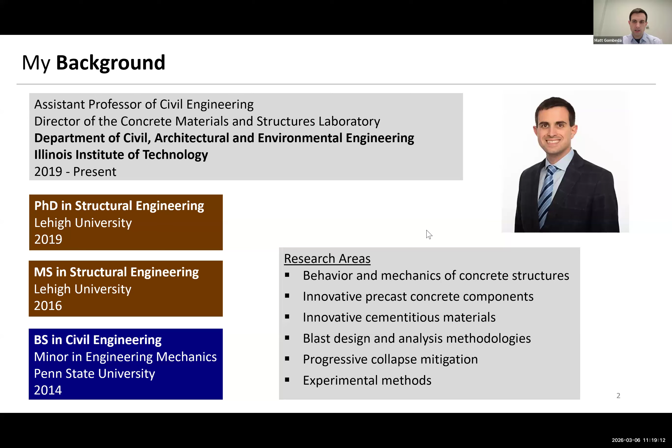Just a little bit about me. Prannoy gave me most of the introduction, but I will show you here again. I went to Lehigh for grad school, and to Penn State for undergrad way back in the day. I work mostly on concrete structures and materials, but a lot with applications for precast, and some blast design and progressive collapse work previously in my graduate school, and even a little bit today as well.

Here is a photo of the other half of the space, which is our high bay, which includes a post-tension precast reaction floor and buttress wall that we designed and erected ourselves, actually. And on the right is an 800,000 pound universal testing machine that we use pretty heavily for some of our tests, as you'll see later.

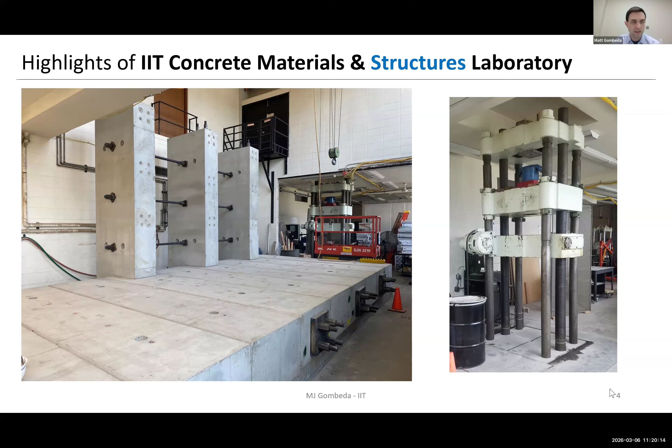Here's just a picture I like to show, as we were erecting the reaction floor. It's kind of funny because Stan, one of our shop technicians, the going joke was that he was just sad because we were taking over the lab with all this new stuff. But in reality he was looking at a little bit of damage on the door, so he was actually quite happy that day.

So, a quick outline of what I'll cover today: I'll do a brief overview and refresher for precast concrete for those that might not be as familiar. I'll talk about some of the work we've done on high volume fly ash concretes with high early strength, and a little bit on concretes for precast that were driven by high early flexural strength as opposed to high compressive strength, which is commonly done in a lot of cases.

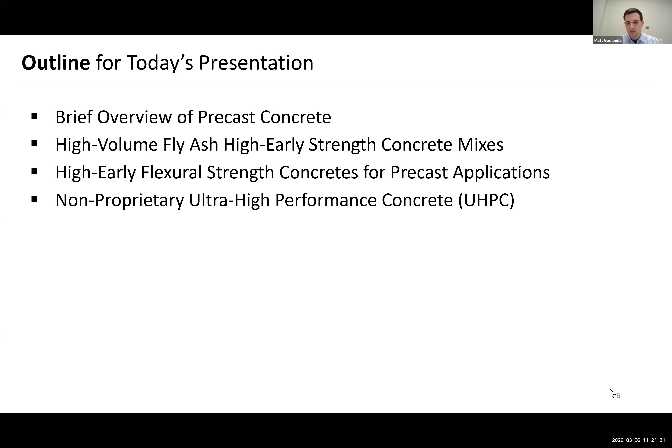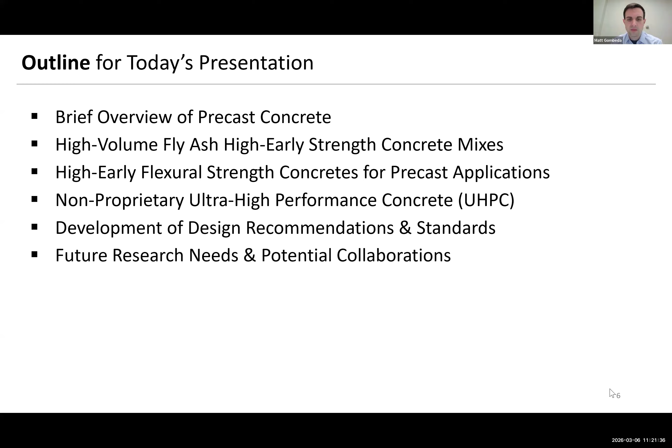I'll also touch a little bit on our work on non-proprietary UHPC and the strength development and the relative early age window that we had with those mixes. I'll talk about some of my involvement that relates to these areas on the design recommendations and design standards across PCI and ACI. And then I'll talk a little bit about what I think the future research needs are and some potential collaborations that I'd like to explore in the future.

So what I'd like to do now is get into a quick overview of precast concrete. The most simple definition I can give is when you're fabricating a structural or architectural component in a location other than where it's going to be in its final position.

It can be tilt up, which means you are building on site and it's cast on the ground, and you literally tilt it up and it stands up as a wall and becomes part of the building. It's not done in a factory, but they use ready mix trucks and cast it right on the ground at the job site.

There's also factory precast, where you have it in controlled conditions. It's indoor and you still have to lift it and move it into position, but now it goes on a truck first before it goes to the job site.

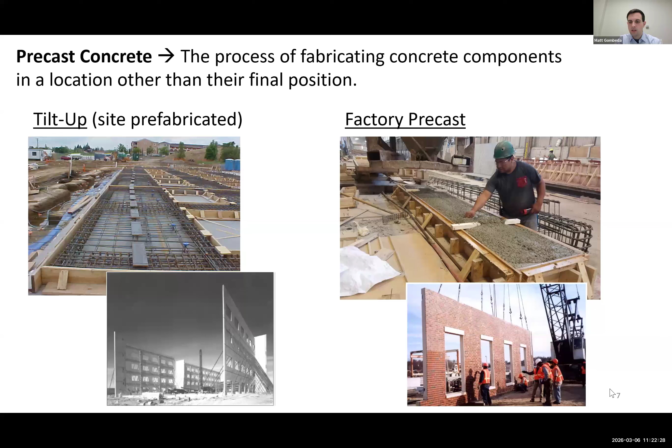Here's one example of a specific precast component that I've worked a lot on. It's called a precast insulated wall panel. It's got two concrete wythes, which can be pre-stressed or non-pre-stressed, but mostly pre-stressed. There's a layer of insulation in the middle that helps improve the R value thermal resistance of the wall.

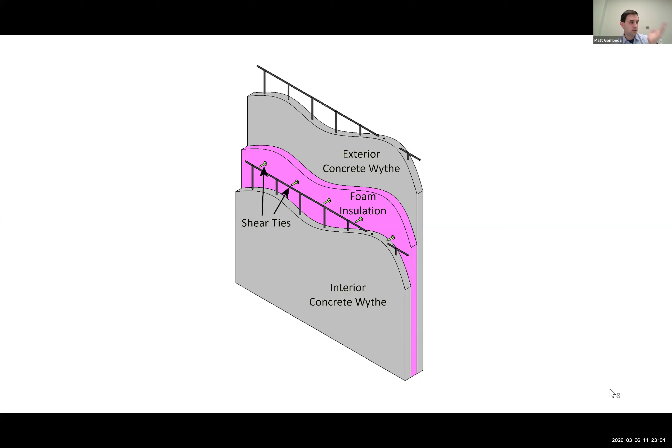But in order to make the wall behave compositely and have benefits for checking stresses and deflections, we connect the two concrete wythes with connectors. Those connectors are usually made of polymers to help further reduce the transmission of thermal energy across the structure. I've done a lot of work on testing those connectors and developing design standards for insulated wall panels in general, which I'll talk about at the end.

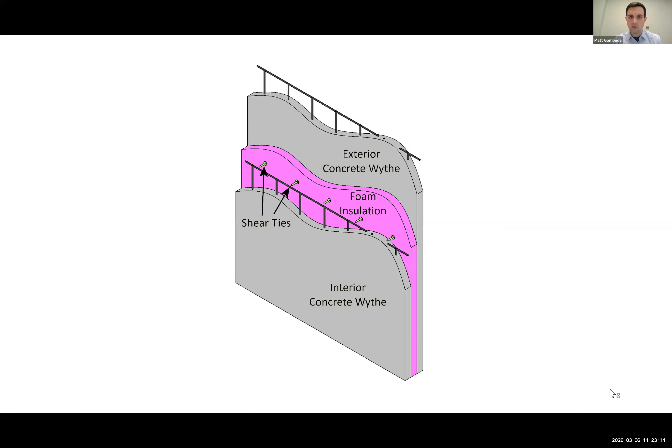But if we're doing precast, we have to not only cast it in a bed and then lift it out, we have to do it very quickly. The reason we want to do it very quickly is a business thing, an operational thing. The more precast components they can make out of a single casting bed, the more efficient from a financial perspective the business is.

We're talking about within 24 hours on most occasions, probably even less most of the time. And for pre-stress members, the pre-stressing strands have to be released before we can remove it from the formwork. So now we have to design for early age compression as the pre-stressing is applied.

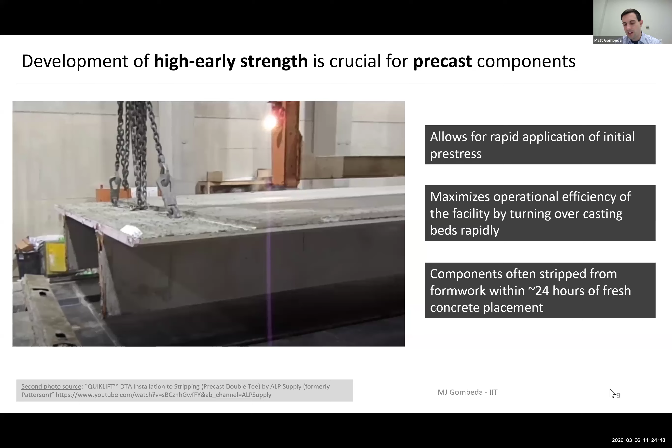We also have to design for early age flexural strength, because when the member is lifted out of the bed, it wants to deflect under its own self-weight. Generally, the number people have targeted is 3,500 PSI compressive strength within 24 hours or less. That number has only gotten more stringent as they try to be more efficient with different designs. So it's kind of like a baseline minimum at the very least.

So I'll walk you through some of the projects here. There's a lot of information and I'll go a little quickly, but if you have questions at the end, I'll be happy to take them.

The first one I want to talk about is a project funded by DOE starting in 2020, on high volume fly ash for high early strength concrete mixes. It was a collaboration—IIT was the lead, with Penn State and Lehigh also involved. The goal of this project was to increase the beneficial use of fly ash by at least 15% in precast.

The reason there's been limitations for having higher uses of fly ash or other SCMs is because we're sometimes at a disadvantage with early age strength gains when we have materials with lower heats of hydration. So there's been a cap, like about 25% for many years of fly ash, because they were worried you couldn't get the higher early strengths if you went to higher dosages of fly ash.

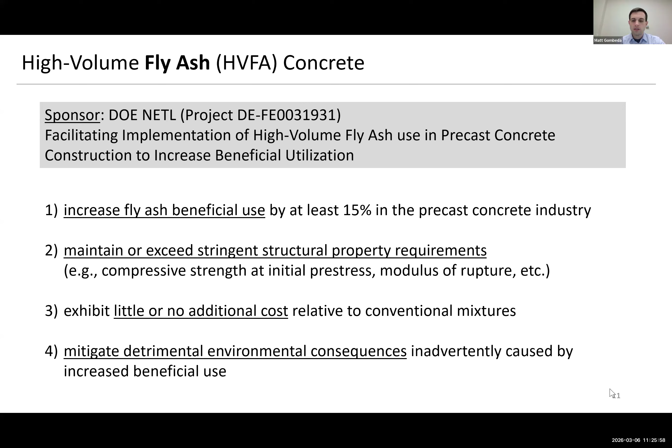We wanted to change that narrative and find other ways to get the early strength even with more fly ash. You can see here an example: typically we're using type 3 cement traditionally in precast mixes, and you get that really high rapid strength gain early on. But when you start to replace that type 3 with larger volumes of fly ash, you start to get lower strength gains—the curve is going to be more similar to what you'd see in an old school type 2 or 1-2 cement at higher dosages.

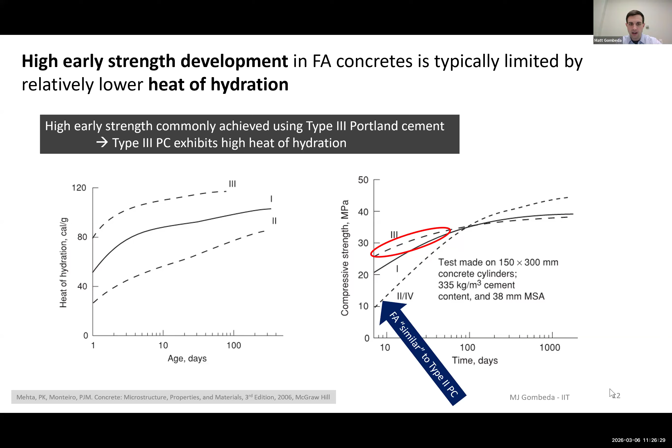You can also see here the effect from another study we did as part of a literature review, where the solid line on both curves is the control, the same mix. When the dosage of fly ash goes up from 20 to 40%, we see a significant reduction in strength gain over 0 to 28 days. But specifically in the early age window, which is where we're most concerned about, that study didn't zoom in on that area as much as we wanted to in our project.

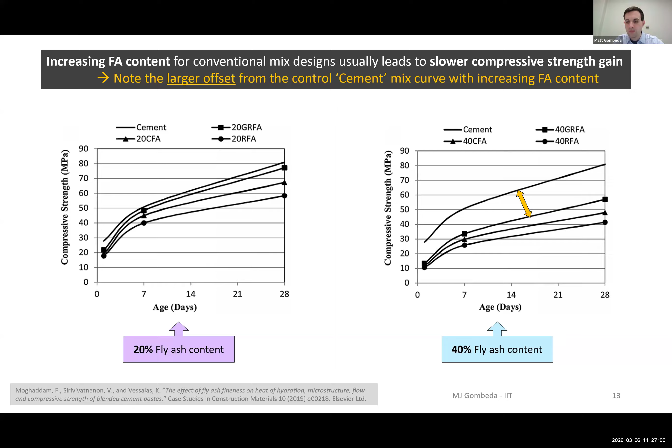So what did we do? The first thing was develop what we called optimized binders. We increased fly ash from 25 to 40%, and looked at using a fresh class C and F, and also a landfill ash from Pennsylvania, with different optimization strategies for dosages, including gypsum optimization that I'll talk about in a bit, and admixture optimization.

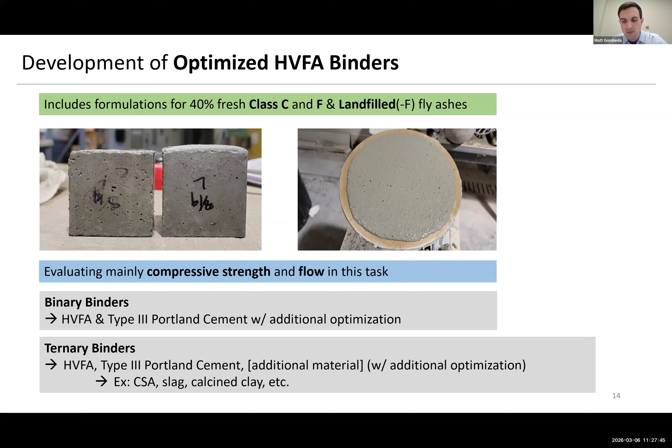We looked at binary binders, but just type 3, because back in 2020, 1L wasn't really common on the market yet. So it was mostly type 3 and high volume fly ash. We also did some ternary binders, which didn't seem as promising, so we moved forward with the binary options.

Here's how we narrowed down which ones to look at from the mortar cubes at this point. Our goal was 4,000 PSI compressive strength at 24 hours for the mortar samples, knowing that if we scale up to a concrete cylinder there's a discrepancy in strength. So we wanted to be conservative when looking at these results.

There's a lot of data here looking at different accelerator dosages and different types of fly ash. But the key takeaway is we were able to exceed our goal of 4,000 for a lot of these options, which helped inform the concrete strength. I should note this part of the study was done by Penn State in collaboration with us at IIT.

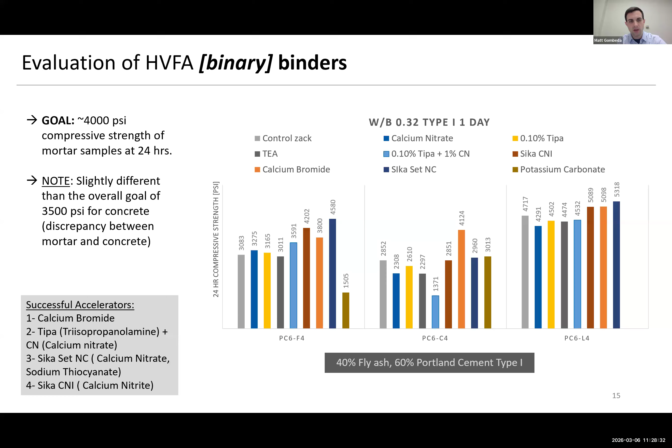One thing crucial to dialing in our strength development was gypsum optimization. When we add more fly ash and reduce Portland cement, we lose some of that gypsum content that helps balance the mix chemically. So we add back gypsum to an optimal dosage to facilitate strength gain, most effective with our dosages of 60% cement and 40% fly ash, plus a little extra gypsum.

This process looks at different trials of gypsum dosages, finding where the peak compressive strength lies with regard to how much SO3 content is added into the binder. For the different types of fly ash, we were able to determine that optimum value of SO3.

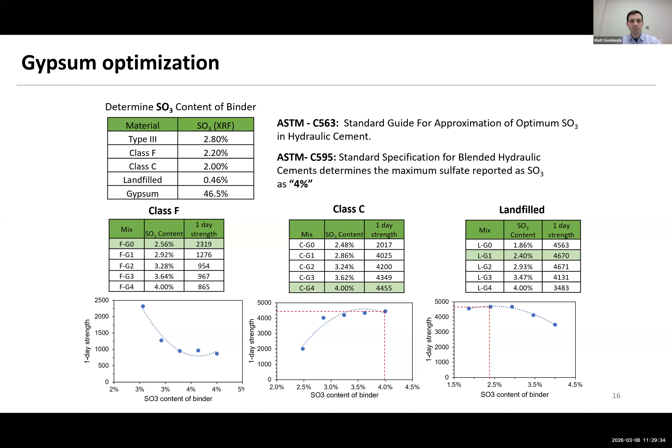We also did another study on accelerator optimization, using a few different products, and narrowed down the dosages of those to again help inform the effect on strength gain.

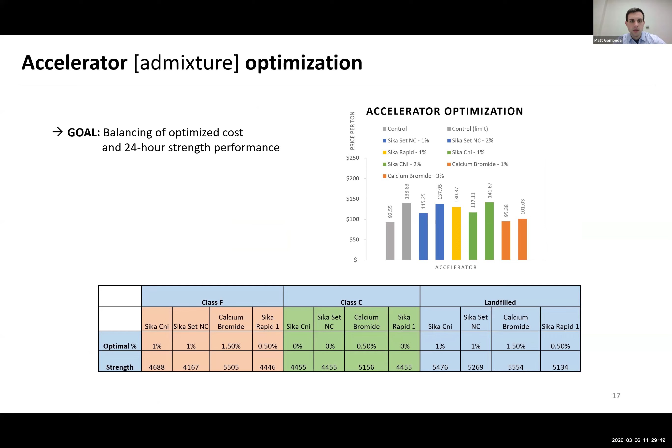So we did 12, 18, 24 hours for the most part, and then also 28-day breaks just to be able to compare to the standard time frame for compressive strength testing as well.

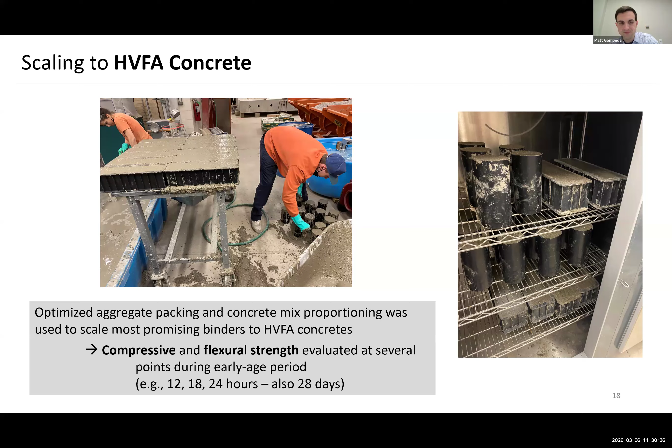Here's a picture of our finished SCC mix in the wheelbarrow, straight out of the mixer. And here's some results for compressive strength. Our minimum goal was 3,500 at 24 hours, and wherever I have the light green is where we've hit that target.

For some of the mixes, a fresh class F, and some Type IL mixes towards the end of the project as those cements were starting to replace the old type 3, we were able to hit our target within 16 hours in a few of the mixes.

An average of 3 cylinders here gets us the results in the table. And then for all of the other mixes, most of them anyway, we were able to hit our goal within 24 hours and a lot of them within the 20-hour window. And we're not using any heat to accelerate the mix. It's purely based on the mix design optimization and the accelerators.

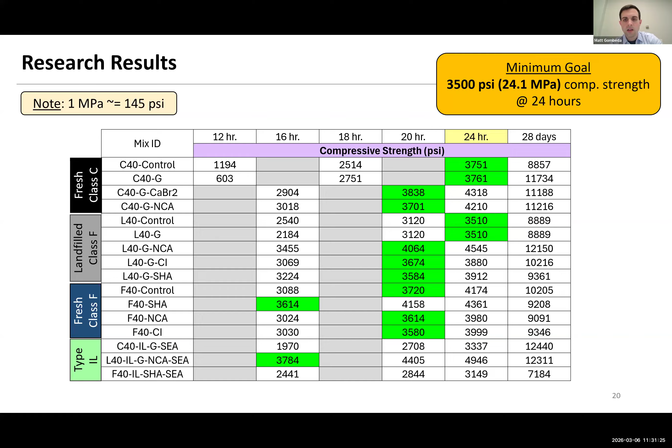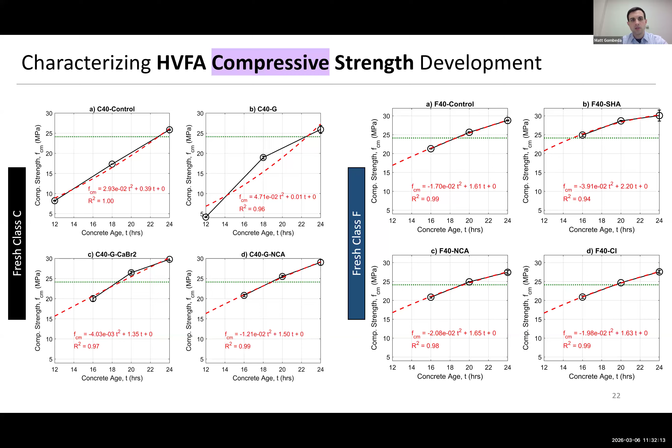The more interesting way to look at the data is plotting it over time to look at the strength gain. What we tried to do here was basically extrapolate the data points that we had to form these curves that could help generalize for these types of mixes what the strength gain profile would look like. So if you had a specific compressive strength target, it could help in the preliminary mix design stage for a precaster to estimate approximately at what age they would be able to get that value. Now, it doesn't replace testing in a plant. They're still going to have to do it for their own mix, but it was sort of a preliminary thing that could help inform how to hit those early strength targets.

And you can see it here for the different types of fly ash, and also at the end, like I said, we included the IL cements.

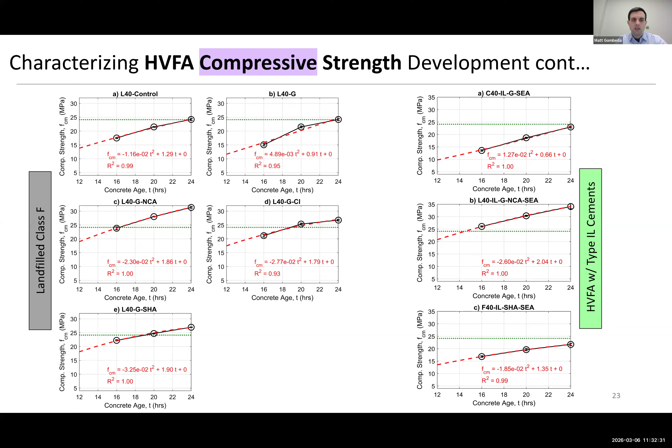Now here's an interesting one. I like this plot because when we relate modulus of rupture, typically it's done by taking the square root of the compressive strength, and the factor in front of it from the ACI code in chapter 19 is usually 7.5. Forgive me here, they're in metric units, so the number is 0.62 instead of 7.5. But you can see here we plotted for the different mixes to determine how conservative or unconservative that ACI equation was, for 2 reasons: because we were changing the mix design, so we have different properties now, but also because that equation was largely initially developed at later ages. So we're trying to actually see how the early age behavior is characterized in this sense.

We found that most of the time it was conservative, which is safe, but also in terms of dialing in the efficiency of the precast plant, the ability to do flexural testing on your own can help get a better idea of exactly when those performance targets are hit.

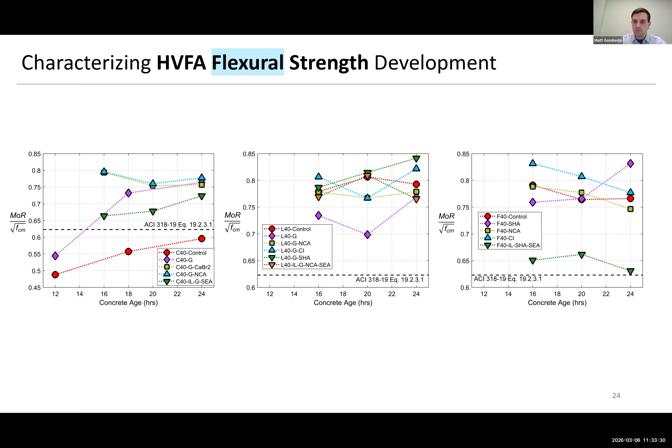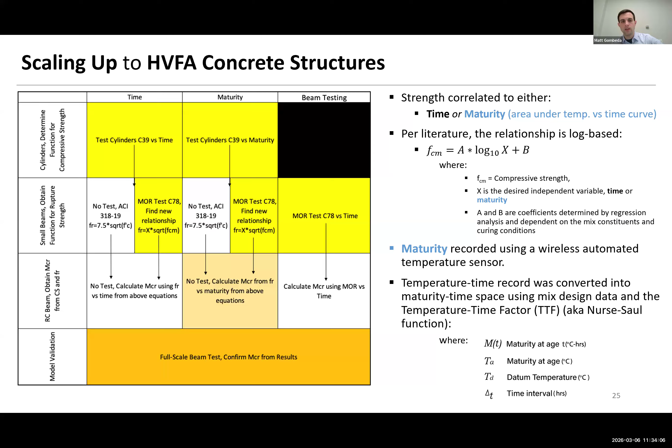So we did some larger scale tests with some inverted T-beams, and our lab is kind of like a mini precast plant. We were able to actually fabricate everything in-house and test it in the same space, a kind of unique thing that we can do here. But if you look closely, you can see there's a maturity sensor on the far end.

So it's monitoring, like I said, the temperature in the concrete. And then one of those sensors is also put in a cylinder when you do the test for compressive strength. Then you can correlate the temperature for both specimens, and we have information that helps tell us predict what the strength in this beam is before we even test it.

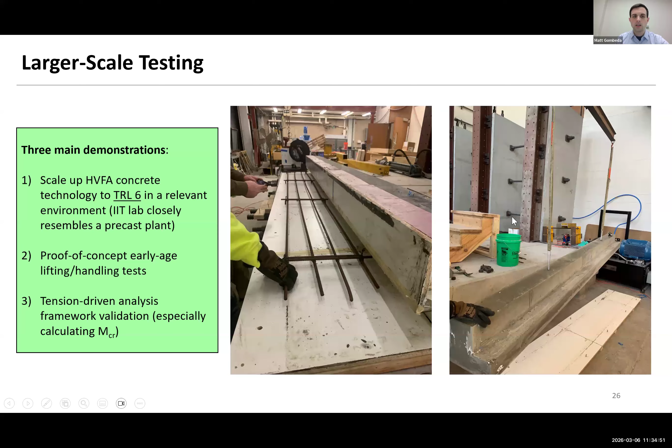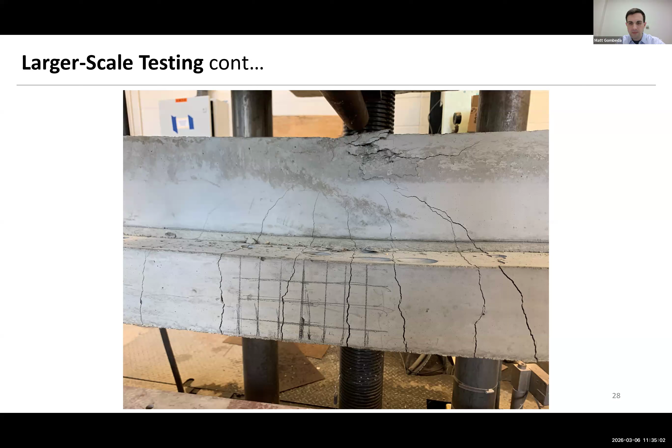So when you use maturity versus when you use just the concrete strength versus time, versus when you do actual modulus of rupture testing, you're going to get slightly different estimates of how you can calculate the cracking moment of the beam, which is something we focused on because, again, with early age lifting and handling, it's a primary design objective in precast. So our comparisons are pretty close. They're a little conservative, but they're within a reasonable amount of error, and we felt confident in our framework and the underlying method used to predict the cracking moment strength.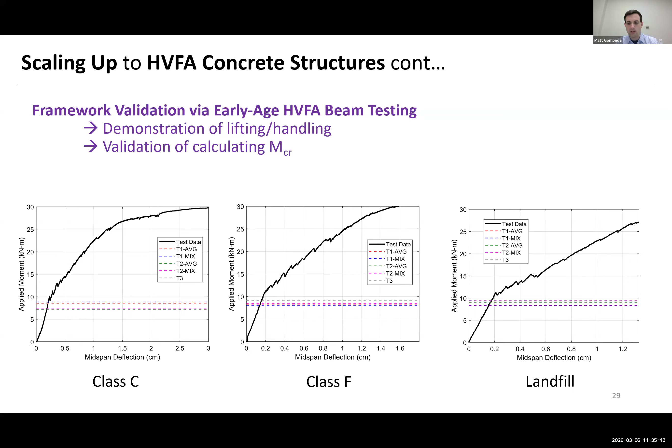So the next project was funded by ACI Foundation back in 2022, and I worked on it with a colleague of mine at Urbana-Champaign, on high-early flexural strength concretes for precast.

The objective was to evaluate the progression of high-early tensile strength, or high-early flexural strength, in non-proprietary high strength concretes that were specifically developed to have that enhanced flexural strength.

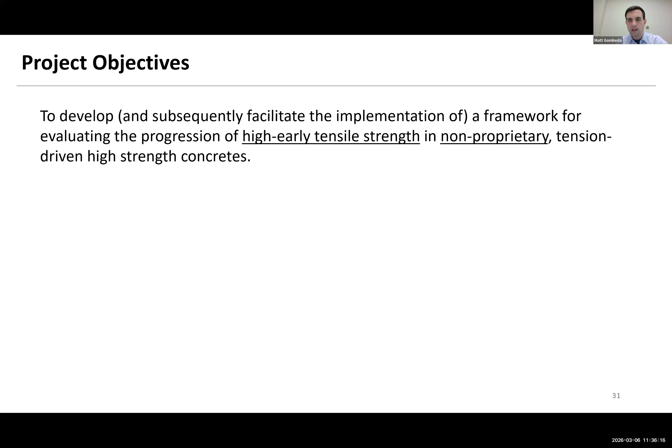In the past, we're so used to this equation where we have a set compressive strength and then we're asked to calculate the flexural strength as a result of that number. But we wanted to move towards a performance-driven flexural strength mix design approach.

We wanted to target a specific number of a modulus of rupture at about 750 psi at about 18 hours. Typically you can hit that number with UHPC or really high strength concretes, but we wanted to create it in a mix that would not have the difficulties or added complexities of UHPC, and also wouldn't exactly tie it to that compressive strength of about 18,000 or so. So it was really performance specifically targeting that flexural strength.

Again, this is great for the precast industry, also great for things like tall building construction where they need to keep moving up floors and release shoring and that sort of thing.

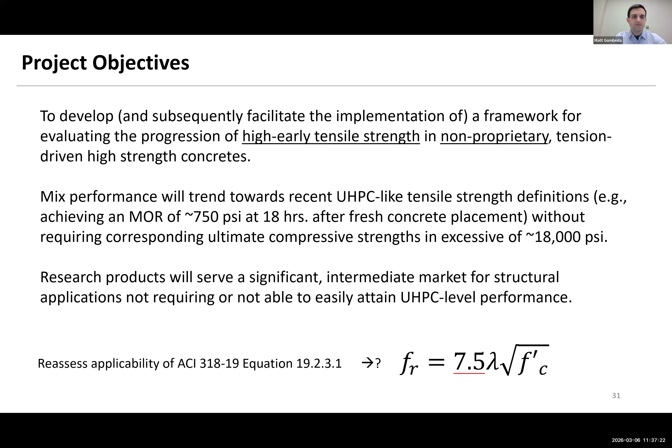So there were trial binders that were started. We generally start from the binders themselves and then scale to concrete and then go to structural testing, as you'll see here. Particle packing was a big part of this work, and my colleagues at Urbana led that effort.

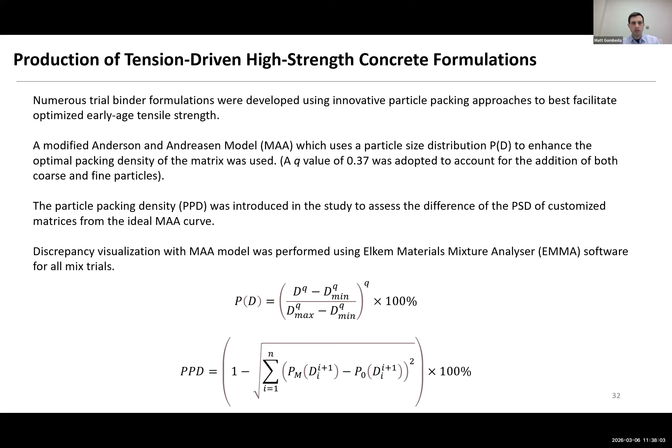They also introduced this term particle packing density to assess the difference of the densities of the customized matrices from an ideal curve, for example. And then they used software to basically visualize these analyses and help inform how particle sizes would be useful in different trial variations of the binders for the concretes.

So here you can see the particle size distributions for some of the materials, with a fine aggregate within the ASTM C33 limits, also for the coarse, the Type IL cement, and then some of the SCMs that were used as well, in the bottom right.

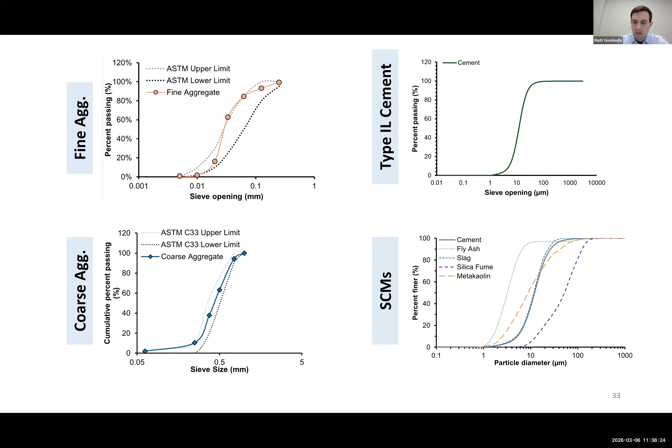And then here's the resulting mixes that we did. Forgive the numbering, but there were trials before 6 that didn't make the cut. So 6 and 7 were the ones that we moved forward with, and you could see the relatively high particle packing density above 90% for both of them. It's doing a pretty decent job of hugging that ideal curve from the A&A model, which is why we decided to move forward with it.

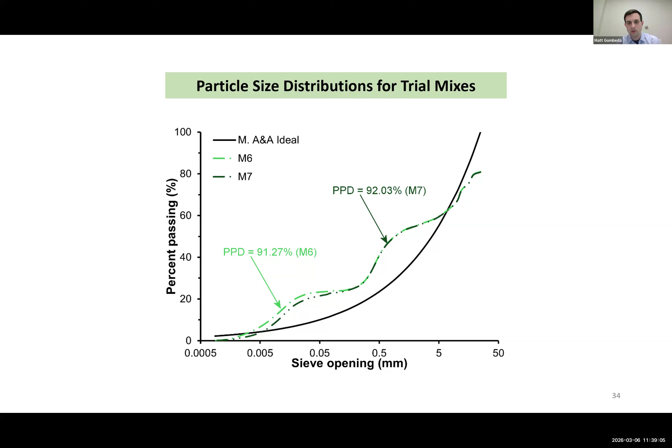It's always a balance, right? We want to develop things that are theoretically as correct as possible, but also understand that using local materials and standardized equipment is going to change how far you can push these efforts. So it's kind of a break-even point of how we can optimize our results.

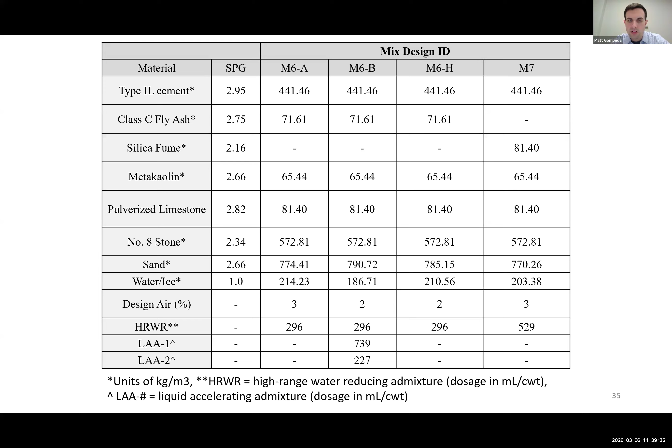And here are the mix designs. I won't go through it all, but we basically had two variations of the M6 mix with different dosages of an accelerating admixture. The second one also had a third variation applying heat to help further expedite the flexural strength gain. And then the last one was using silica fume as a replacement for Class C fly ash.

Here's some workability properties that we measured from the testing that we did. All of the slump flow target was to get SCC performance, so we're at or above a 20-inch slump flow in each of those cases, which was satisfactory for us.

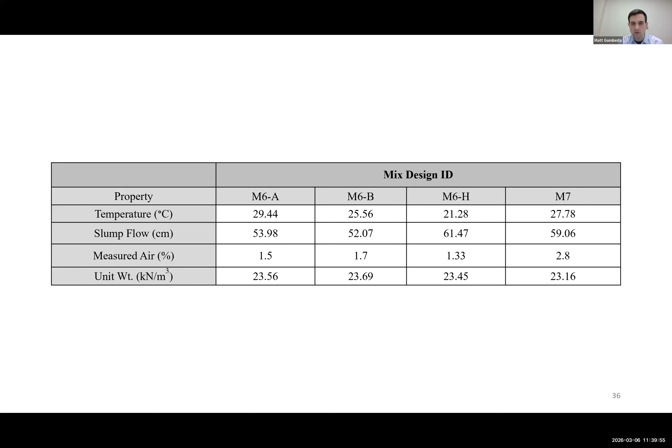Then we look at the early age modulus of rupture performance. Our target was again 750 at 18 hours. We got pretty close — it wasn't easy, but we were able to get 722 in the heat mix, and over 700 in the first M6 mix. As we get to 21 hours, we start getting really close to that target, and we're surpassing it pretty easily at 24 hours. So while we didn't exactly get it at 18, we got it pretty close.

There still can be tweaking that can be done to even push it over that threshold, and we're still working on some of that stuff.

Just to give you an idea of the corresponding compressive strength, at 18 hours we have 47 MPa, so somewhere less than 7,000 PSI, high 6s. We're hitting these targets that normally we would hit with much higher strength concretes, but we're in the 6 or 7,000 PSI compressive strength range, which shows that difference in the correlation of those two values.

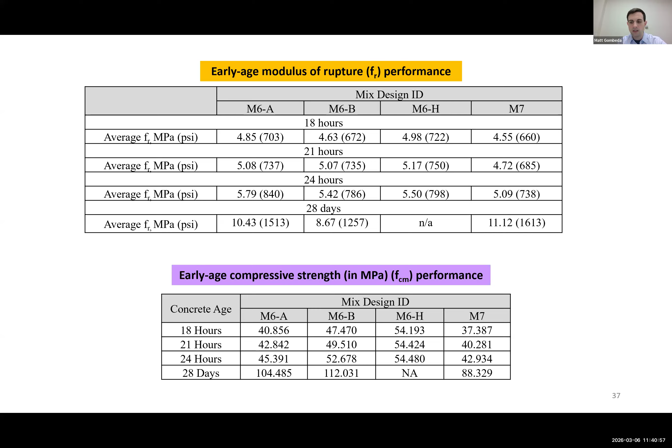Even if it's a little bit conservative, there's still some room to dial it in a little closer.

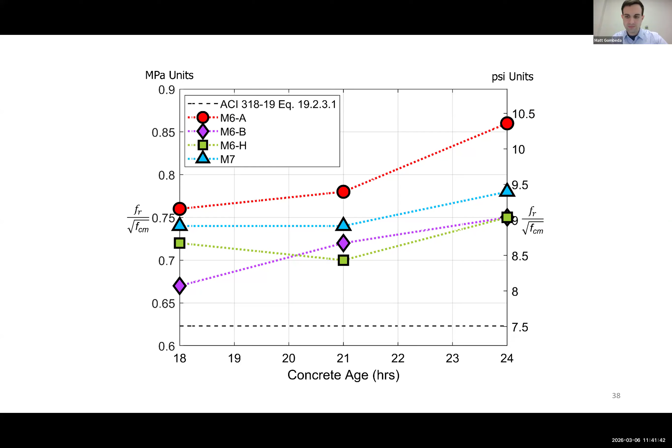Here's some testing we did on modulus of elasticity, which basically shows that the ACI equation for MOE, which is 57,000, is a little bit unconservative in a lot of these mixes, likely due to even some of the aggregate properties and whatnot. But I don't want to alarm anybody here. One suggestion is if you're going through all the trouble to do flexural strength testing and compressive strength testing, it's not terribly more difficult to also do the MOE testing, which helps get better estimates for things like deflections and stiffness when needed as part of structural analyses.

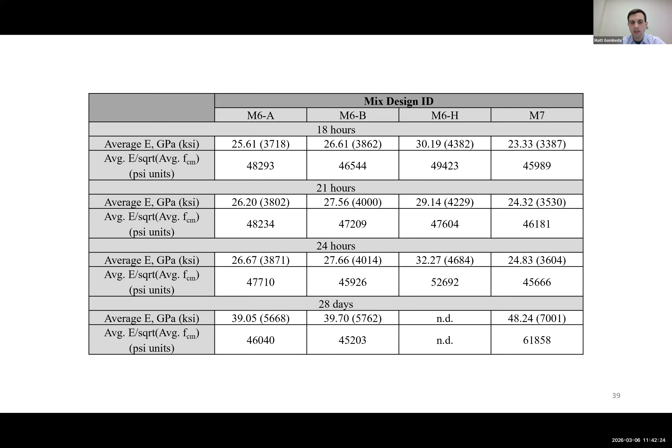We did structural testing on that one as well. Again, something we fabricated. My students work on putting the rebar cage and reinforcement cage together, and we do all this stuff in-house. So we kind of pride ourselves on the ability to do all that.

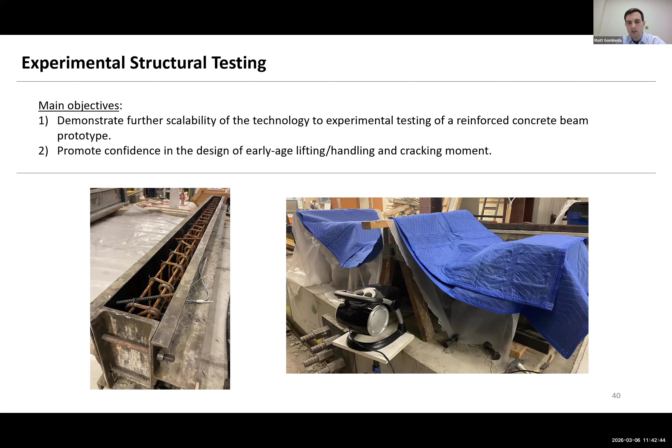It was heat cured. The beam was heat cured, as you see there on the right. And then here's some photos of the test.

We basically used the properties that we had generated earlier into an open source component level fiber beam column element model and predicted the results. Generally speaking, it's a pretty decent match.

Once you start to get past the yield point or whatever in structural concrete, matching becomes more and more difficult. With more work, we'd fine tune that curve, but in general we were able to show that we're in the right ballpark and our peak strength is within some reasonable amount of error of taking those properties in the calculations and predicting the test results.

Here's another example on the stiffness side, with a reasonably small percent error in the tangent stiffness from the test and the theoretical stiffness when we calculated it from the E that we measured in the test and the gross moment of inertia.

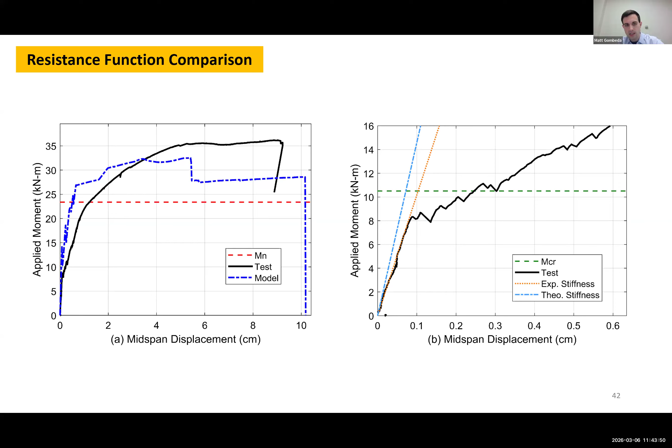The last project here that I'd like to talk about is our work in non-proprietary UHPC, again with Urbana-Champaign. This one is funded by IDOT.

I'm sure most people here have an idea what UHPC is, but we always give this general slide of what it is and show this nice pretty curve. Great, but I like to refresh everybody with the minimum definitions for strength.

ACI 239 says that in compression it used to be 22,000, but in recent PRC it's come down to 17,500, which is consistent with what Federal Highway also specifies in their documents. On the tensile side, we have the ability to take advantage of the increased tensile strength and tensile ductility when we have steel fibers included. What 239 now says is that the direct tensile strength should exceed 720 psi, and Federal Highway says the effective cracking strength in direct tension, basically the strength of the UHPC specimen before it initiates cracking, before the ductility really takes over, should be about 750 psi minimum.

But the current obstacles are not so much on the strength side. It has a lot to do with the proprietary nature making things more expensive, and non-proprietary mix designs require a little bit more thinking and frameworks. There's still a relatively high cost associated with these mixes, and mix times are too long.

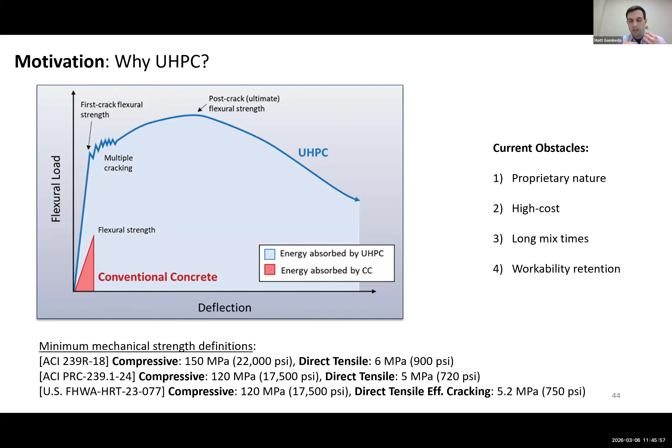Workability retention is a huge issue. The flow being met right out of the mixer is one thing, but then you come back ten minutes later and we get things like skin formation. This mix really starts setting very quickly and it's hard to finish, which is a problem.

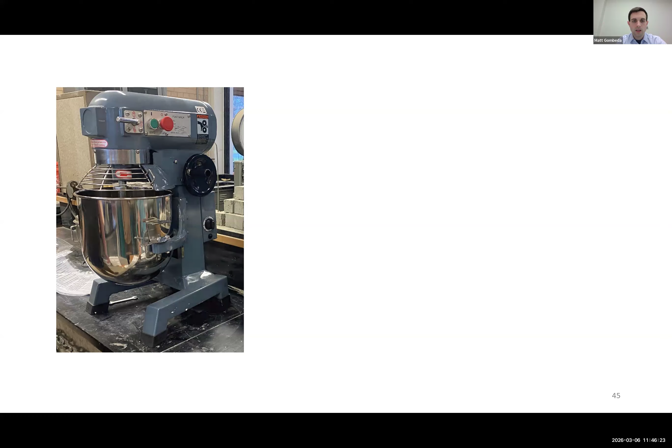So what we did is we basically re-engineered some of these mix designs for non-proprietary mixes to be able to be used with local materials in Illinois. It started on a benchtop scale with small cube specimens using this mixer here. We developed this method of when to add the materials, how long to spin the mixer, and how to evaluate the performance at different steps before we discharge and make specimens.

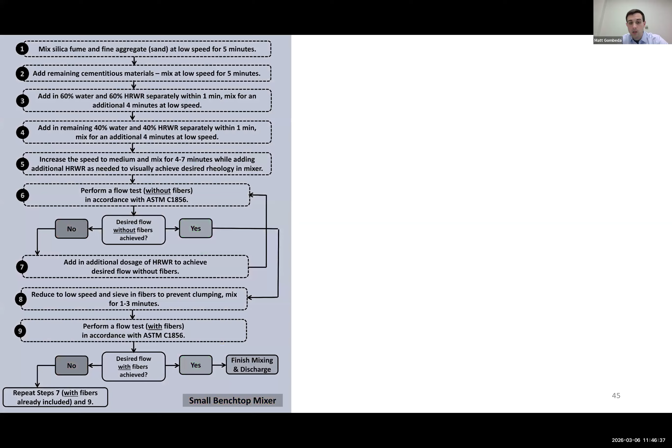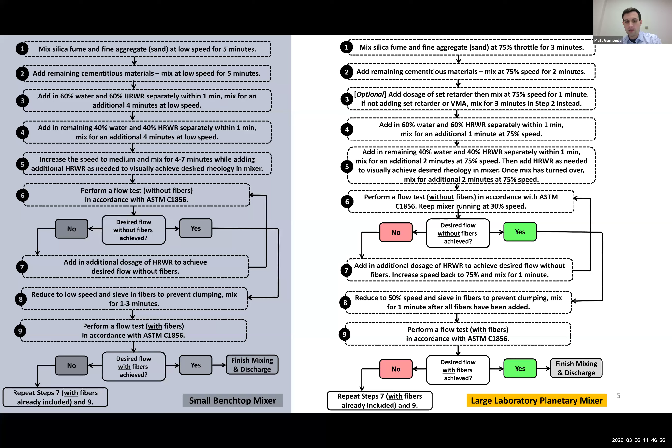But that method was ultimately superseded at the larger scale when we went up to the bigger mixer. You can see it's very similar to the framework, but a little different because we had to dial in how the larger quantity of concrete affects this work and the different type of mixing action. So what we did was get these results for a couple different variations of the UHPC mix.

So we have one that is chamber cured in accordance with C511. We had one that used a class F fly ash sieved through number 200 to emulate an ultra-fine fly ash, which was part of the original development. We recognized that not everybody had access to the ultra-fine fly ash, so we wanted to come up with an equivalent way to produce it with the standard fly ash.

And then we also had the dash A ones that were done ambient. Some of these members you're not going to have the luxury to do in a chamber, so we wanted to also look at the variation in strength when we had ambient conditions versus ideal conditions in the chamber.

You can see the compressive strengths here, the cube specimens in the table on the left, and then the cylinder specimens on the right that we did at the larger scale, the last three of which had 2% steel fibers in addition, and the first ones we did with the cubes did not in this case.

So just a little bit of looking at the variation here. The average of the specimens done at the 3x6 scale versus the cubes were within about 6% difference on average. Again, there's no fibers, but we recognize the fibers don't have a substantial role in the compressive strength. We're not evaluating tensile ductility right now, but we just wanted to make this first comparison.

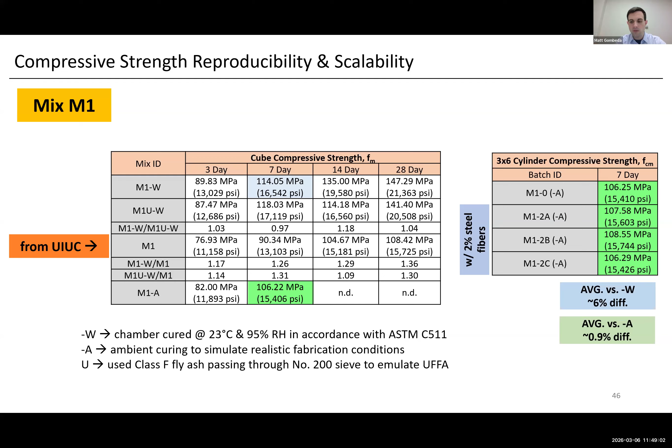Here's an interesting study we did that looked at calculating some of the statistics. The goal here was to calculate the coefficient of variation considering all these different variations we did in the mixes. The first column is all of the different mixes with the different scales, the cubes and the bigger scales, and all of the different changes in fiber dosage and all that stuff. So there's not consistency there, but it's done on purpose just to see what the overall COV was across everything.

And it was about 7%, which isn't terrible. When we just look at the stuff done in our lab - the initial one was done at UIUC - when we look at just everything done at IIT, it was reduced to 4%. When we look at everything that includes just the standard Class F fly ash, it goes down to 2.8, as opposed to the sieved version.

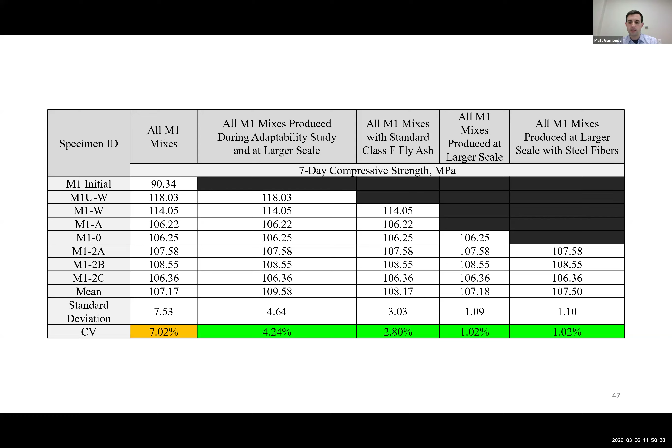If we go then to just the mixes produced at the larger scale with the 3x6 specimens, we're at 1% COV. And we get 1% again if we look at the variation with those produced with steel fibers only. So the COVs here are actually really good across all these slight variations, giving a standard characteristic average value without much deviation for all these different mixes at different categories.

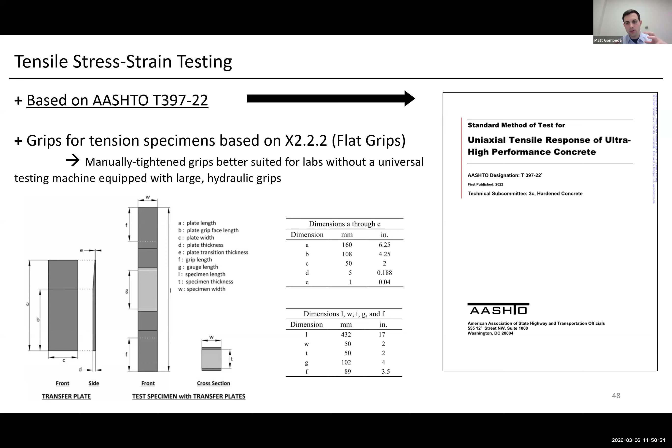And then we did the tensile stress strain testing with AASHTO T397. We used a manual grip setup because we didn't have a machine with hydraulic grips large enough to accommodate the 2x2 specimens. We wanted to adapt this method to labs that maybe had similar issues where they didn't have a ton of extra equipment to do these tests.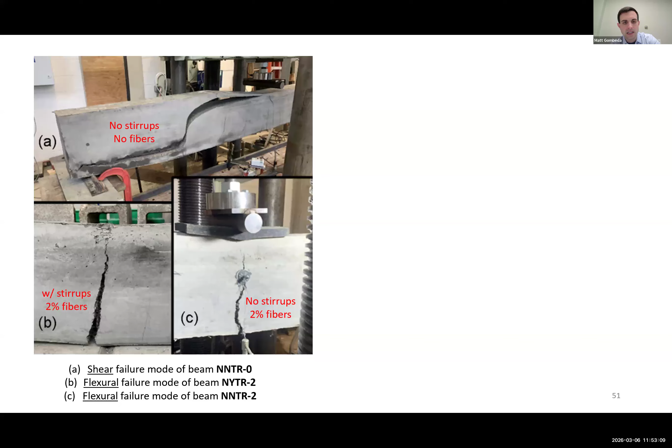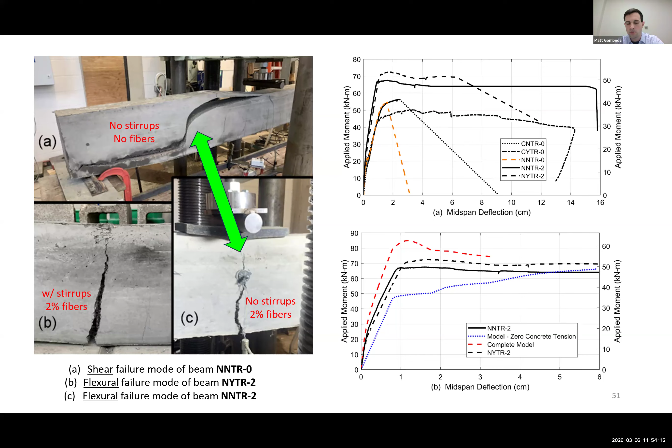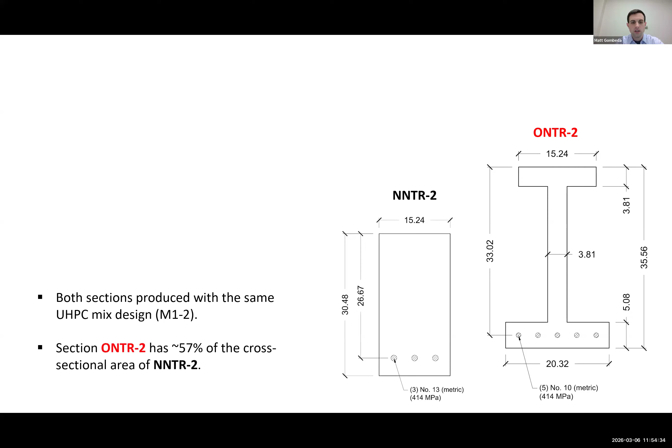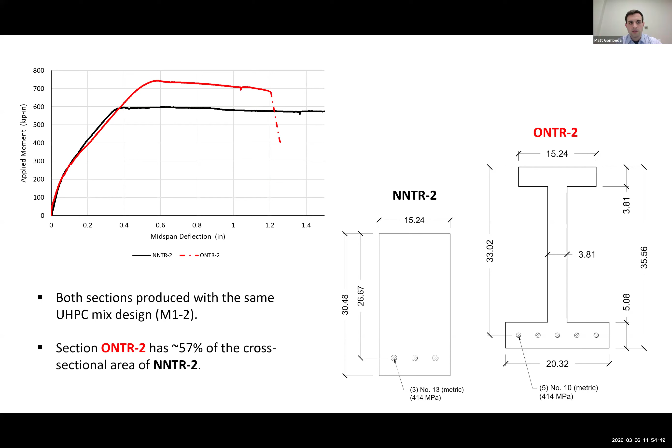Here we then sought to develop an I section, a more efficient use of materials. It was done really thin, like 1.5 inches thick in the web, which you couldn't do with standard concrete. The idea here was to compete with a structural steel section. The I section is about 57% of the cross-sectional area of the rectangular one, but the flexural strength, when we ran the computational model, gave us about a 20% boost in strength.

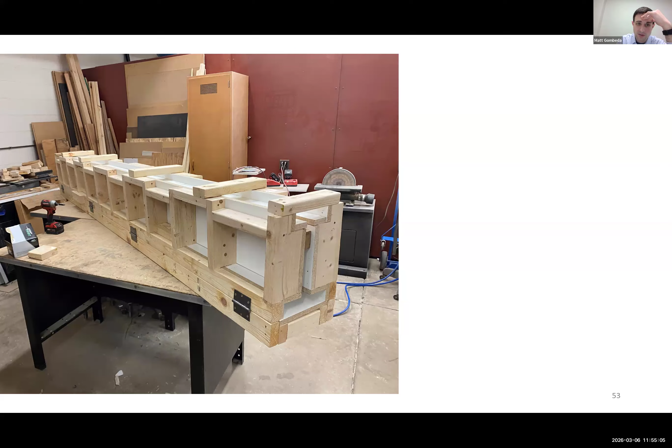Here you can see some photos of us fabricating the mold. I have my students become carpenters and make formwork. I really like them to get hands-on experience with these sort of things. And there you can see the I section that was cast.

And here it is during the test. We put some blocking in there to eliminate the local bending in the flanges under the load and under the supports.

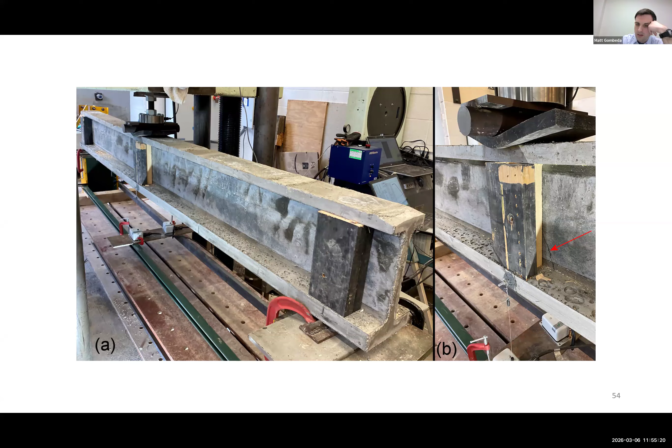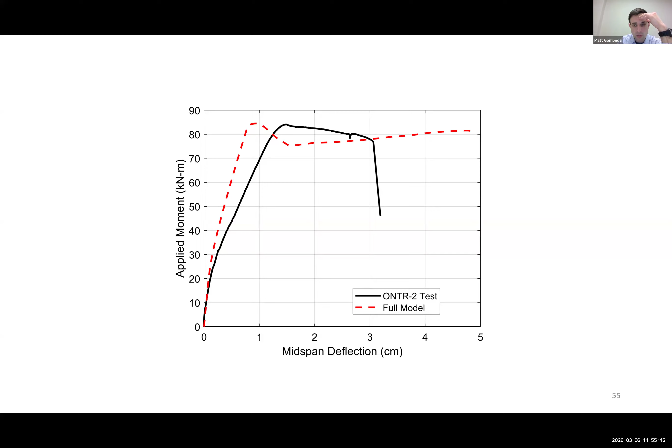And then here you can see the comparison of the test in the black curve with the full model that we had earlier, using the same computational modeling approach. The peak strength is almost a perfect match. There's a little bit of a discrepancy in the post-peak behavior and the stiffness past the proportional limit, but in general, from a strength perspective, we were quite pleased with the comparison with the results.

So those complete the projects. I'll do a little bit now on my involvement.

I was one of the authors on this PCI standard that was released in early 2025, on the design of precast insulated wall panels.

I've also been heavily involved in the development of PCI 319, and I was on the design standard committee of PCI that helped develop the new precast code and the insulated wall panel one. I also serve on 318 subcommittee D, which is structural members. It basically helps inform chapters 7 through 11, I believe, in ACI 318, on beams, two-way slabs, and columns, and those sorts of things.

I've also worked on revising this document for Committee 232, which is a report on high volume fly ash concrete for structural applications.

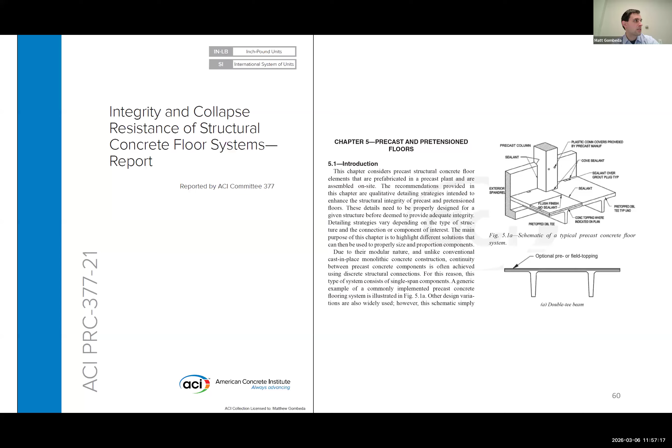I was also a lead author on Chapter 5 of this ACI 377 report, on precast and pre-tensioned floors for collapse resistance and structural integrity in buildings. As Prannoy mentioned earlier, I'm currently the chair of 377, where we focus a lot on things like progressive collapse and general resilience of concrete structures.

A lot of my other work, especially back in grad school, is on blast design. I'm still heavily involved in the PCI blast committee and also a member of ACI 370, on concrete structures for blast effects.

I'll get into a couple research needs and collaborations. I do want to give a quick shout out - I talked a lot about PCI, and I was talking to Prannoy earlier that PCI is going through a phase now where we're increasing our research awareness to people that have not been involved before.

We have a lot of needs in the precast industry centered on things like materials, different types of AI, robotics, and even industrial engineering. What I'd like to see is more younger faculty become engaged at PCI. I recognize people can only do so much, but there's a lot of people out there with good expertise in early age strength, reactivity testing, and durability that would benefit from involvement at PCI.

So I'm the vice chair of the R&D council there. We're going through some changes and exploring ways to have more funding opportunities for young faculty and others to get engaged. I'll share that information as it comes along, but I just wanted to give a little plug about my experience at PCI being favorable and encourage others to get involved as well.

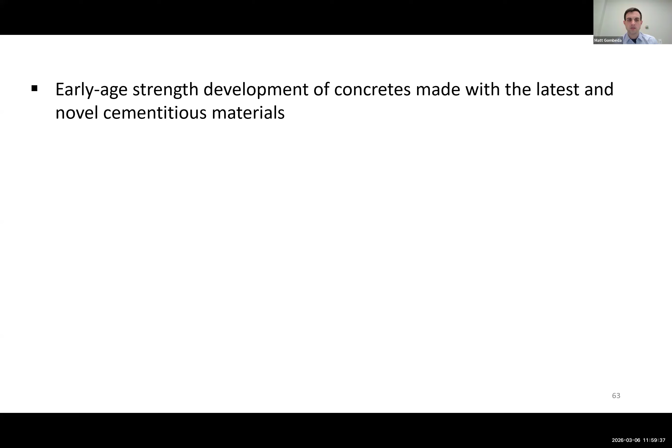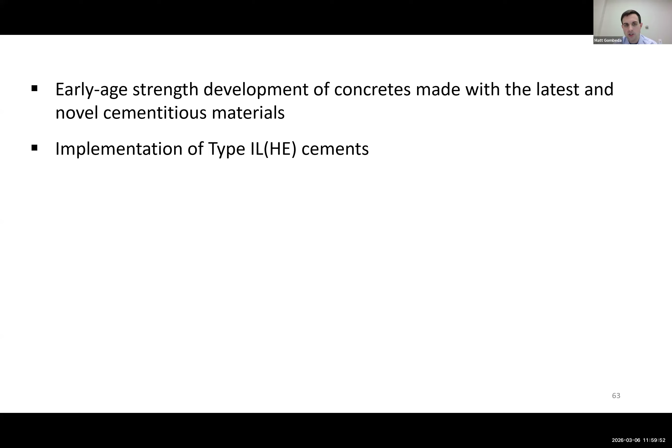Future research needs - here's some of the things I've come up with over the years. There's still a lot of work to be done with early age strength and concretes made with novel cements, looking at potential implementation of what the next generation of IL cements looks like. I've heard about IT, ternary blends of cement with Portland limestone cement, and also a potential HE version that's still not widely used. We're still looking at the production side or implementation side of non-proprietary UHPC mixes, to reduce mixing times and make it more finishable.

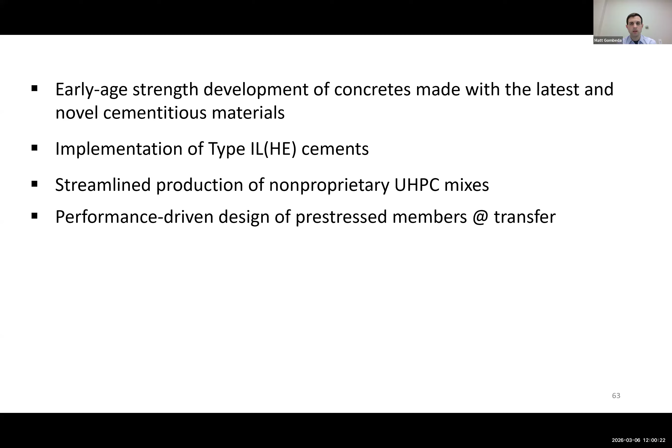Looking at performance-driven design of pre-stressed members at transfer - increasing early age strength is one way to solve the problem, but also doing more detailed analyses of how to achieve the stresses in a pre-stressed member at early ages when we release the strands would also benefit us.

Any innovative precast design solutions are fair game for me. I also have an interest in 3D printed concrete with more complex states of stress, such as if you were to precast it and had to lift it and pre-stress it. And any kind of experimental test methods for concrete materials and structures.

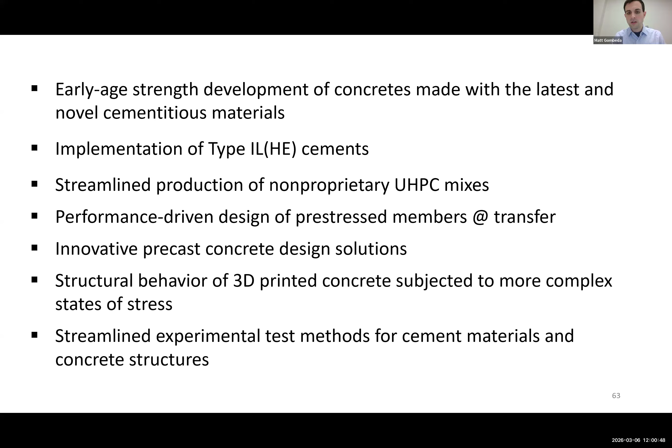So that concludes my presentation. Happy to take any questions or feedback, but I'd just like to thank everybody for listening, and Prannoy for this opportunity to present today.